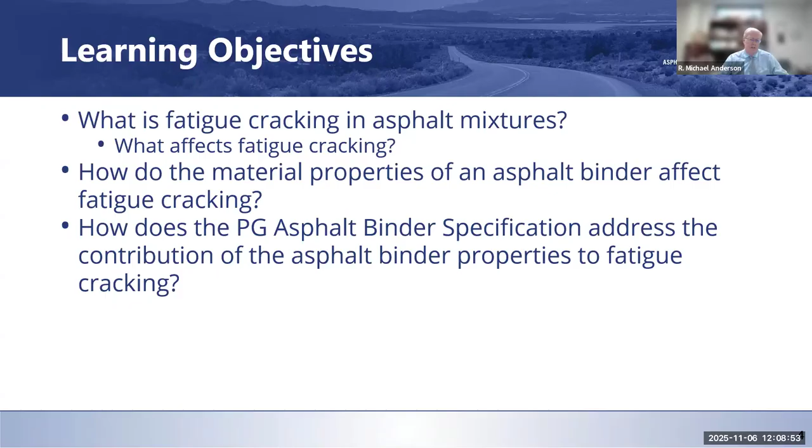Penetration grading came about around 1946, moving to viscosity grading in the early 70s, and then we went to PG grading in the 90s. So it makes sense that we've had something around for 30 years. Materials are a little different, tests are a little different. Maybe it's a good time for us to look at whether the specification needs to evolve a little bit. And that's really what this research, not only the 959 research but also the 960 research, was intended to look at.

So the first thing I did was pull this slide, which is actually from the training materials developed for Federal Highway Administration Demonstration Project 101, back in 1994. The Federal Highway Administration, specifically their Office of Technology Applications, wanted a way to educate people on the new PG system.

So it started with, how does the binder specification address some of these distresses? I pulled this pretty much verbatim from that slide deck, just because I thought it was interesting to go back and look at what we said Superpave was doing, and how that applies to what we're doing today.

So fatigue cracking, when we're talking about that, it's distress in the wheel path. It's progressive damage, usually showing up first as longitudinal cracking. You can see it progress to alligator cracking or potholing. When we say alligator cracking, it looks like the back of an alligator, and eventually some of those pieces break out and you get potholes and that sort of thing.

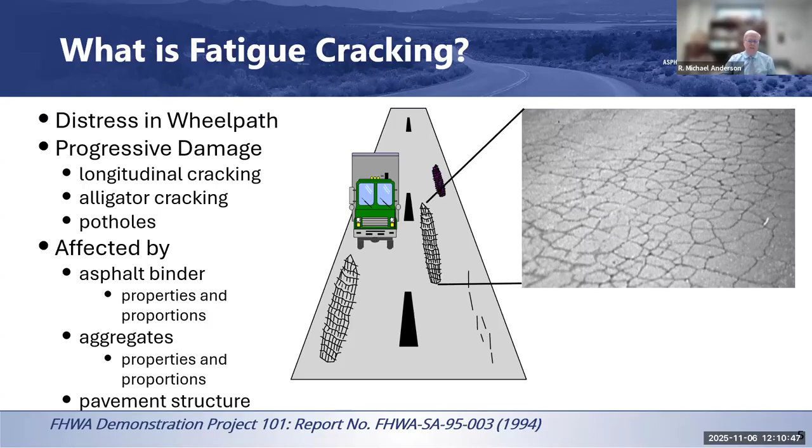It's affected by asphalt binder, both the properties and proportions of the binder, as well as the aggregate properties and proportions, and the pavement structure. All those things have to work together for fatigue cracking. You can have one or two of those be great and one be really poor, and you can still have a problem. Whenever we see distresses, we've got to look into the cause of those things - sometimes it's materials related, sometimes it's design related, sometimes it's construction related. All of those things can definitely have an impact on what our actual performance is going to look like.

Dr. Dave Anderson, many of you know Dave, took this picture and used it in training for our certification programs through the Asphalt Institute. It's a good picture of fatigue cracking on a roadway - a beautiful picture, except for the road looking a little bit cracked up.

Fatigue cracking itself is a very difficult, complex thing to describe. You can have bottom-up cracking, which is where we see alligator cracking. But the other thing people see is top-down cracking, and that's a little bit different. So cracking is not all the same, and I think that's why it's really been a challenge for us to figure out how to characterize what impacts fatigue cracking, or what cracking in a roadway looks like.

So again, this is just a little bit newer version of what we were saying - basically that you're going to have asphalt binder, mineral aggregate, volumetric proportioning, and other factors that are going to happen.

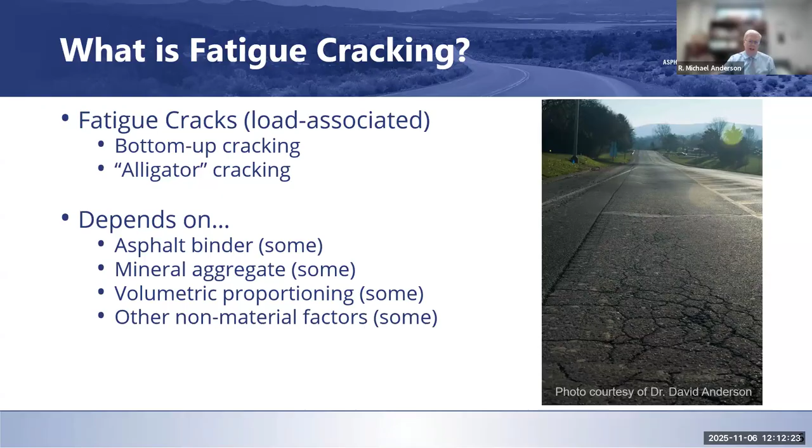We'll talk a little bit more about top-down cracking, because that's usually caused from shear stresses at the surface, where it exceeds the strain resistance overall of the mixture. That's something a little bit different than the traditional bottom-up fatigue cracking we're looking at. We'll address both of those throughout this series.

So a little bit on asphalt concrete behavior, or asphalt mixture fatigue behavior. Again, this is another image we use from the FHWA Demonstration Project 101, the Federal Highway Administration National Asphalt Training Center text, if you will. It basically was just trying to indicate, how do you get longer fatigue life? How do you get shorter fatigue life? Not that you want it necessarily, but it's kind of the converse of what you see there. And then what are some of the exceptions you see?

So really, to achieve that longer fatigue life, we're typically looking at bottom-up fatigue. We're looking at more flexible materials that are softer, less brittle. The asphalt binder plays a big role in that, and that's important particularly if the pavement structure is relatively thin. Reducing the strain in the asphalt mixture is really going to help out. So if you make the pavement thicker, you're reducing the strain before you get to the bottom layer.

That's really going to help reduce that strain overall, and help with performance. As far as shorter fatigue life, it's really the converse. You're not trying to have those things, but if you're looking at why you're having shorter fatigue life, it could be stiffer materials, thinner pavements, higher stress strain levels, and that's kind of where the exception comes in, because it's that structure that matters as well, including the non-deflecting support layers.

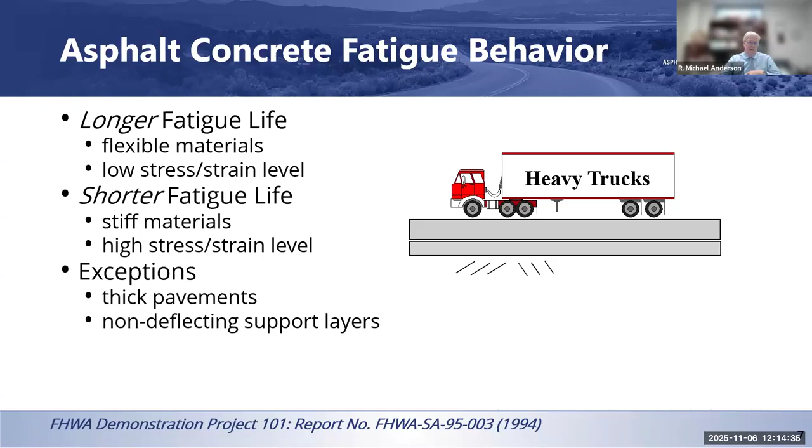So during SHRP, how did they address fatigue cracking? If you go to SHRP report A367, it talks about how they selected the specification criteria so that you got satisfactory resistance to fatigue cracking. Basically, within an asphalt binder specification, what you're wanting the asphalt binder to do is to do its part. You don't want it to be the cause of a failure. You want it just to do its part. It's not going to be able to overcome weak subgrades or whatever have you. It just needs to not be the reason why the failure is occurring.

And so they recognized that during SHRP, it's perhaps the most difficult challenge in how to put it together. They talk about it first occurring late in the life of a pavement. So what that means is you've got to test the asphalt material in a stage that simulates what happens after it's been in service for a number of years. That's really at least part of the reason why the pressure aging vessel was developed, to try and simulate that longer term aging we were going to see in the binder, so you could characterize what it's going to look like after it's been on the road several years.

Then they also talk about ideally those properties including crack propagation properties as well, but noted those are considered too complex for use in a specification, and surrogate properties must be selected as the specification criteria. So if you look at fatigue cracking, what they generally do is break it down into initiation of the crack and then propagation of the crack. So part of it is getting the crack to start, and then how does that crack progress? They felt putting both of those together was a little bit too complicated, but if they use surrogate properties, they could relate to those.

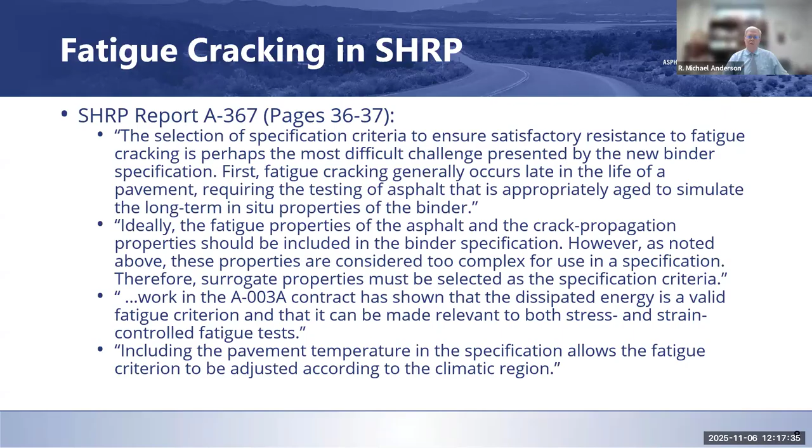And they also recognized that a specification needed to include the pavement temperature to allow the fatigue criteria to be adjusted, so that it's appropriate for the climatic region overall. So that was an important piece of it. We didn't want to just do it at 25 degrees C, for instance.

So what did all that mean? Well, dissipated energy, as they talk about it up there, in a dynamic shear test is appropriately calculated as G star times sine delta. And so that's where that came from.

That's why we've got this PG intermediate temperature criterion that we use on the DSR, this G star times sine delta property that reflects the dissipated energy in an asphalt binder after it's been aged a number of years. They used and relied on that in light of a number of field trials, but one of the ones they reference is the Zaca-Wigmore test road, and they referred to Figure 22 there in the SHRP Report A367, and I thought that was interesting.

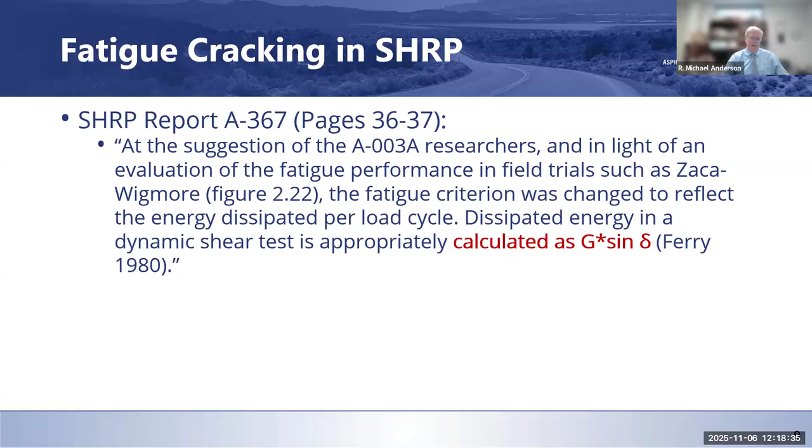You can go back and look at the Zaca-Wigmore test road, and what you'll find is there's a reference. I think I may have it on one of these slides. If not, you'll see it in the notes to this presentation. But in 1969, there was a paper in the Association of Asphalt Paving Technologists Journal, AAPT Journal, volume 38, called Final Report on the Zaca-Wigmore Asphalt Test Road, by Zube and Skog.

In that paper, they looked at this test road that was placed in the 50s and monitored into the 60s. They looked at this and found there were two main types of failure that occurred during service life on the project. First was fatigue cracking, and they said that was the most prevalent overall.

That was related to recovered asphalt binder stiffness. So at least a large part of that, the consistency of the recovered asphalt binder, was related to the dissipated energy, or G star times sine delta. From that standpoint, they looked at that parameter and said, okay, that's the reference for what we're going to look for in a fatigue parameter within the PG system.

The other part of that was not something directly addressed, I'll say, but it was recognized, and that's that they also had block cracking with raveling. That was more prevalent in the passing lane. So fatigue cracking happened in the driving lane, where you would expect it, since that's where the traffic loading was. But in the passing lane, where you didn't expect much traffic, they found block cracking with raveling that was due to a gain in shear susceptibility during weathering.

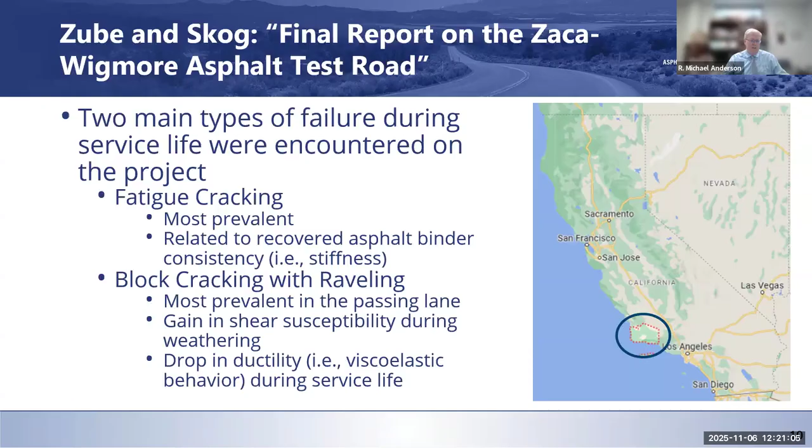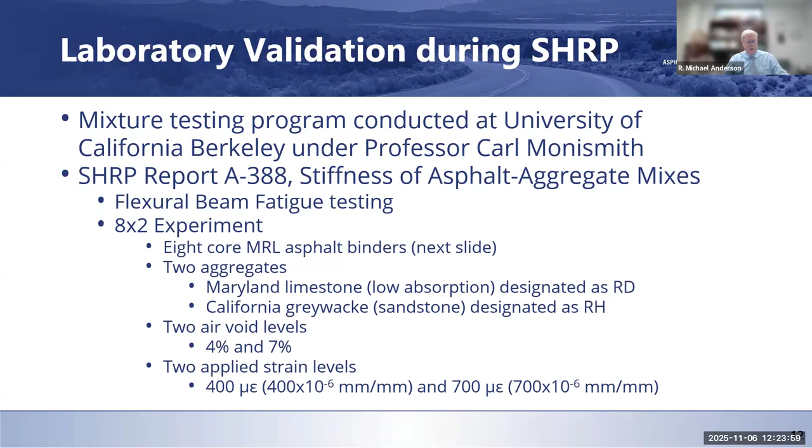One was a Maryland limestone that was low absorption. The other one was a California graywacke, which was a sandstone, and they were designated as RD and RH. There were 2 different air void levels, 4% and 7%, and 2 different applied strain levels at 400 microstrain and 700 microstrain. Those specimens were compacted using rolling wheel compaction in the lab, and then they cut the slabs out and proceeded to test them.

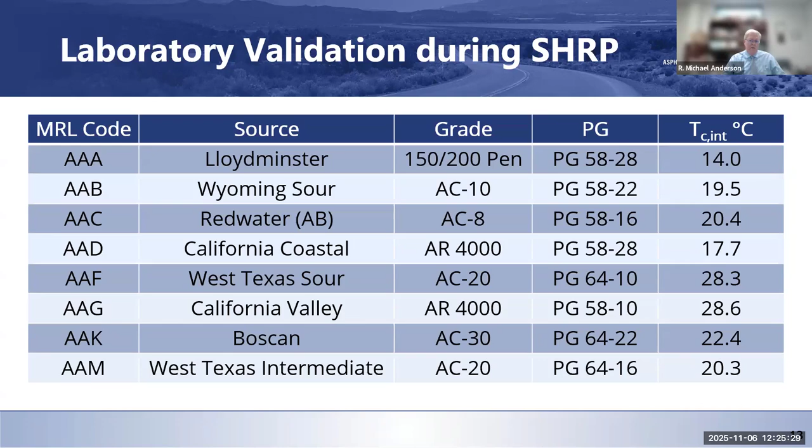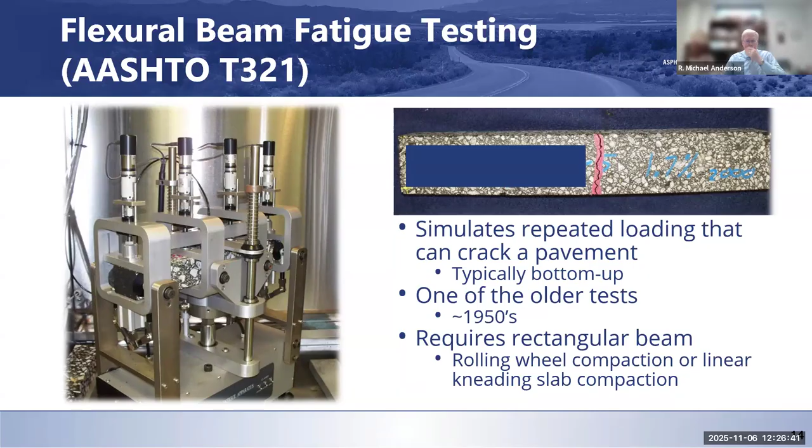So you can see what the beam looks like after it cracks. You develop micro cracks and then ultimately cracks that occur in the specimen. We've just used a red paint pen to kind of highlight what that looks like within the specimen itself. It does require a rectangular beam, so it's not something that we used routinely with our gyratory compactors - we don't make those specimens.

So how do we analyze this data? In the original version of the procedure, it was defined - failure was defined as whenever you reached a number of cycles where the stiffness dropped to 50% of the original stiffness. That's how failure was defined. It was called N sub F.

It was not necessarily, it was really based more on unmodified asphalts, I guess, than certainly on modified asphalt, but it was believed to represent the point where microcracking would develop into macro cracks, and then you would eventually cause the stiffness to drop more dramatically. It did seem to work reasonably well for unmodified materials.

As we started using more modified materials, as different types of materials came on the market, it was not necessarily representative. And some work that was done by Dr. Geoff Rowe with Abatech and I think Dr. Mark Bouldin, who may have been with Koch or Shell at the time, I'm not sure which, but they did some work where they looked at defining a new way of defining failure.

And it has to do with the point where the product of flexural stiffness times cycles was a maximum, and that indicates the onset of cracking that would occur. If you plot that against the traditional way of looking at it, for unmodified asphalts, it tends to be right around 50% still, but for modified asphalts, it does a much better job of characterizing that material.

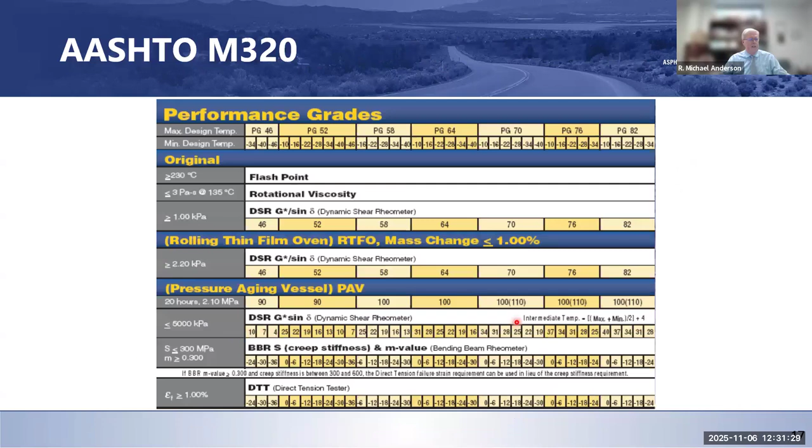So ultimately, this is what led us to AASHTO M320 - the intermediate temperature parameter, the DSR G star times sine delta after PAV aging. That's our intermediate temperature for cracking fatigue.

Some of the challenges we had early on - you saw high variability in the DSR, particularly at that intermediate temperature. This was reported originally in some of the first proficiency sample programs from AASHTO Resource, where they looked at between-lab variability for G star times sine delta being at 40%, which is quite high. To put that in perspective, you could have a lab with a 3,400 kilopascal value and another lab with a 5,100 kilopascal value, and those would be considered within acceptable tolerance.

So they would be considered statistically the same. That's not something folks feel comfortable with, which means if you're trying to produce a material, you want to make sure you're building in for that variability. So you have to adjust for that when you're making your production. And that was a concern, obviously, in what that looked like.

Now, through time, through training, through better equipment, all that sort of thing, the variability has reduced, and you can see it's now down. More recent precision values are at 27.4%. That's better. Still some variability, but certainly better than what we saw originally.

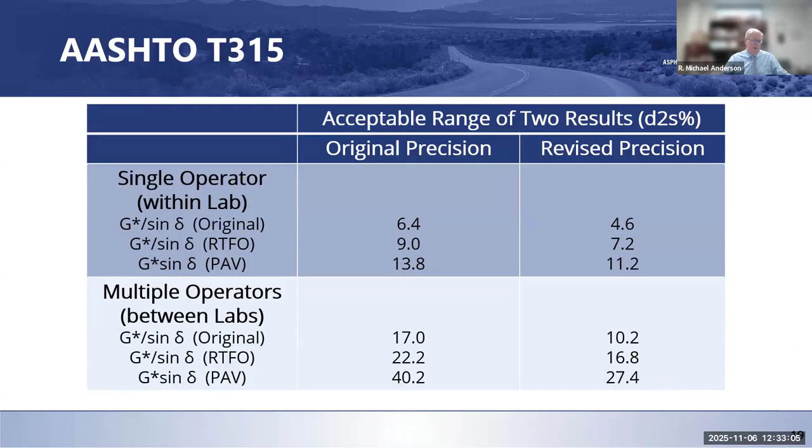But that led to some concerns about, well, how do you have something a little bit better? And ultimately, that's where this came in. This was a revision suggested through the task force of the Asphalt Institute Technical Advisory Committee, along with some work done within the expert task group, binder expert task group, to look at intermediate temperature stiffness, what the phase angle would be, and how might you allow something that seemed a little bit stiff but otherwise had good viscoelastic properties - through the use of phase angle, a minimum phase angle overall.

There were a lot of things looked at to try and reduce the variability. That included using larger plates, reduced strain levels. Those were all things being done.

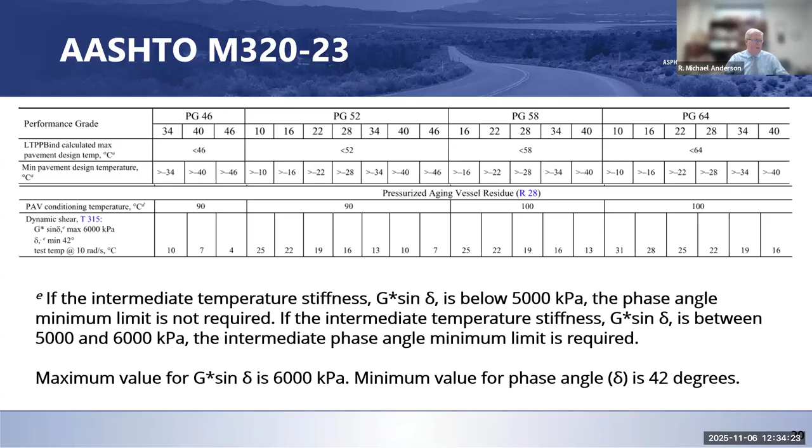But because we couldn't lower the variability through changing test conditions, it seemed appropriate to ask how do you adjust it to account for the fact that you've got a binder which has a little high stiffness, but its phase angle is still pretty good, indicating good performance and what should be better relaxation. That's what led to this proposed change that ultimately got adopted in AASHTO M 320, the 2023 version.

So let's go to NCHRP report 673, from 2012. This came from NCHRP 9-33, which looked at mix design and a commentary on how you make changes.

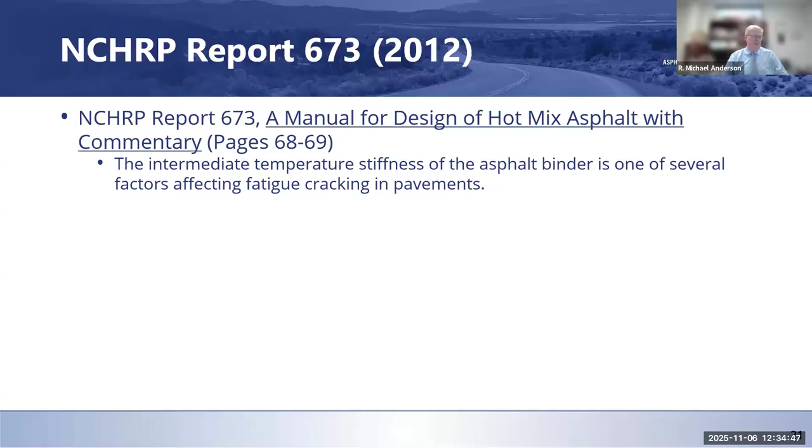What they noted was that intermediate temperature stiffness of the binder is one of several factors affecting fatigue cracking. They did say top-down cracking was an important distress, not just bottom-up fatigue cracking, particularly in overlays and thicker pavements. It was not a distress that was completely understood, but binder stiffness was at least a contributing factor.

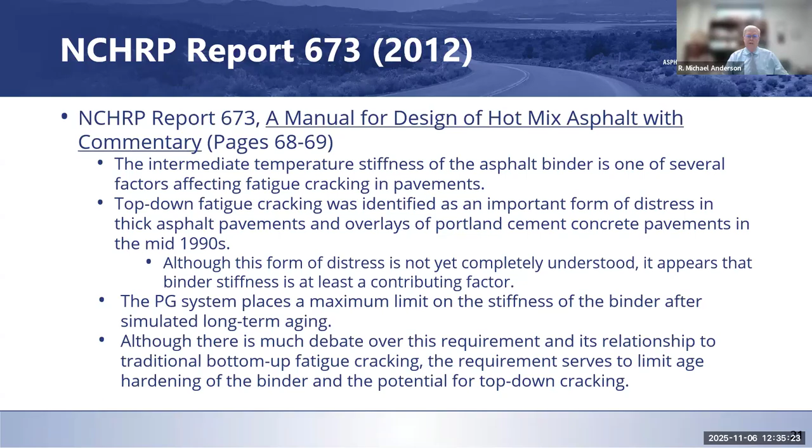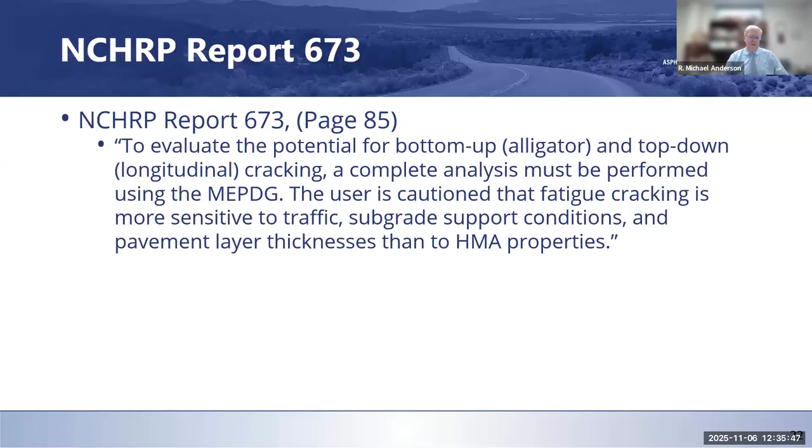The PG system places a maximum limit on stiffness after simulated long-term aging. It does serve to limit age hardening of the binder and potential for long-term top-down cracking. But they also caution that if you really were going to look at bottom-up alligator cracking, top-down cracking, and longitudinal cracking, you should take a look at a complete analysis using the MEPDG, noting that it's more sensitive to traffic, subgrade support conditions, and pavement layer thicknesses, possibly more so than even HMA properties.

So again, what we were looking at is controlling or mitigating the impact of what role the asphalt binder has to play in what fatigue cracking is going to look like.

So our learning objectives overall: we wanted to know what fatigue cracking is in an asphalt mixture. We talk about that as repeated loading from traffic that results in longitudinal or alligator cracking. It's tensile strain at the bottom of the asphalt layer that exceeds the strength of the mixture, and that's where you get cracking that propagates to the surface. If you're talking about top-down cracking, it's caused by excessively age-hardened asphalt.

So what affects fatigue cracking? Mixture stiffness, which is a function of in-place air voids, the volume of the asphalt binder, stiffness, and age hardening. That may not even be a complete list of what affects mix stiffness, but certainly those are key factors in what mixture stiffness in service looks like.

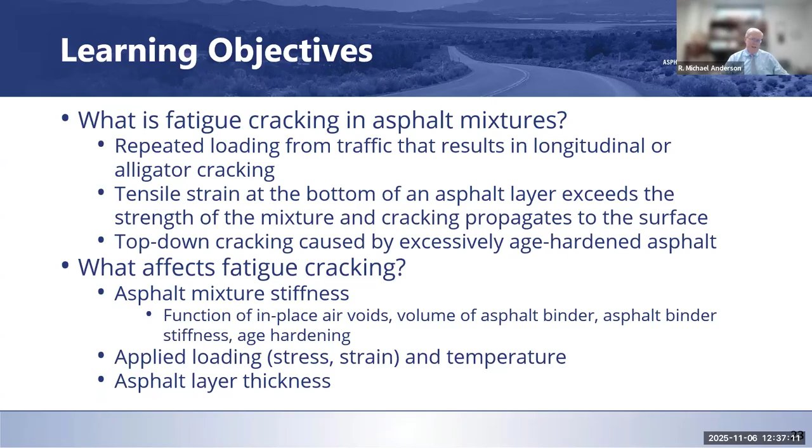The applied loading is going to affect it - how much traffic you've got on it, how heavy is the traffic, what's the strain being transferred down to the bottom of the layer, and what's the temperature? That's going to matter as well. It impacts the stiffness, it impacts what that strain is going to do. And then the asphalt layer thickness is also going to matter. Those are all going to play into it.

How do the material properties of an asphalt binder affect fatigue cracking? Stiffer asphalt binder after aging can lead to increased cracking that we see in thinner asphalt mixtures in particular.

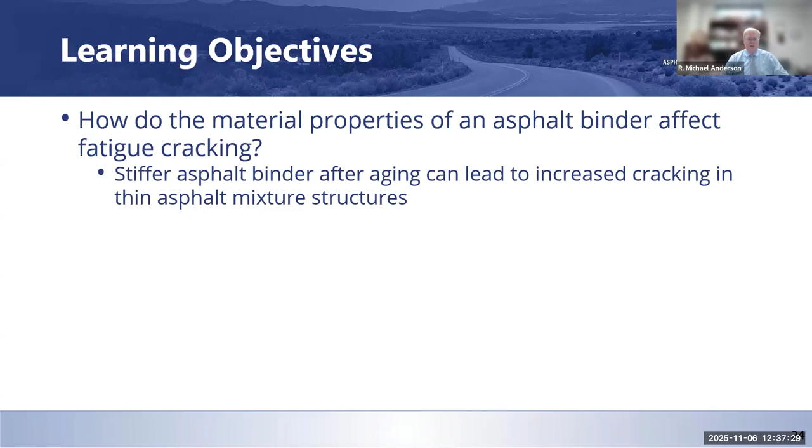And then the last thing we talked about in the learning objectives was how does the PG asphalt binder specification address the contribution of the asphalt binder properties to fatigue cracking? We want to limit the stiffness of the binder through the use of the dissipated energy parameter, that was G star times sine delta, determined after aging at intermediate temperatures appropriate for the asphalt binder grade and the climate in which it was used.

That specification limit in the PG system was based initially on the observed fatigue cracking they saw largely on the Zaca-Wigmore asphalt test road, with recovered asphalt binder properties after 8 years in service. It was validated in part through laboratory experiments conducted during SHRP, and ultimately that's how they came to choose the parameter used within the current version of the PG system.

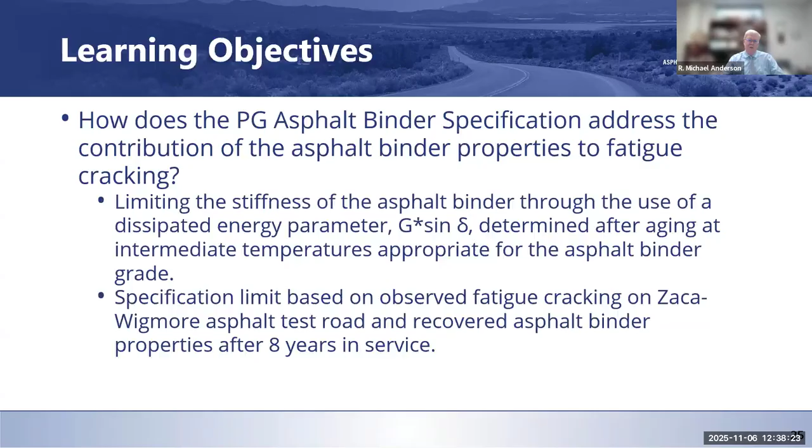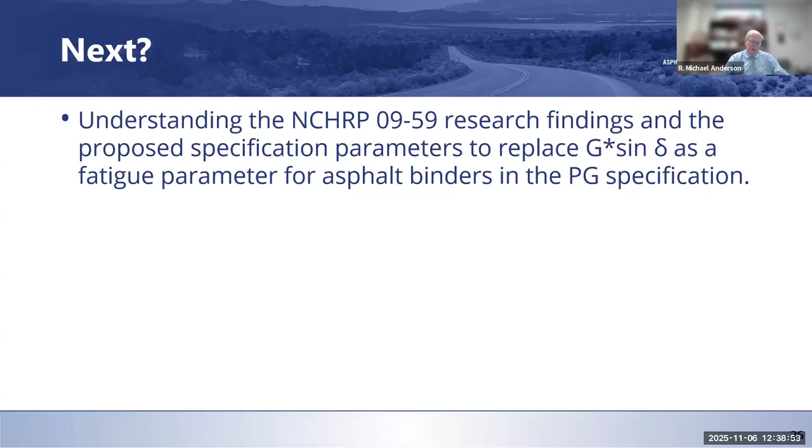So what's up next for us? It's really understanding what the NCHRP 09-59 research findings were, what they have proposed as specification parameters to replace G star times sine delta as a fatigue parameter for asphalt binders in the specifications. We'll talk a little bit about their findings in the next presentation, and in the following one, we'll talk about the recommendations and what the impacts are overall.

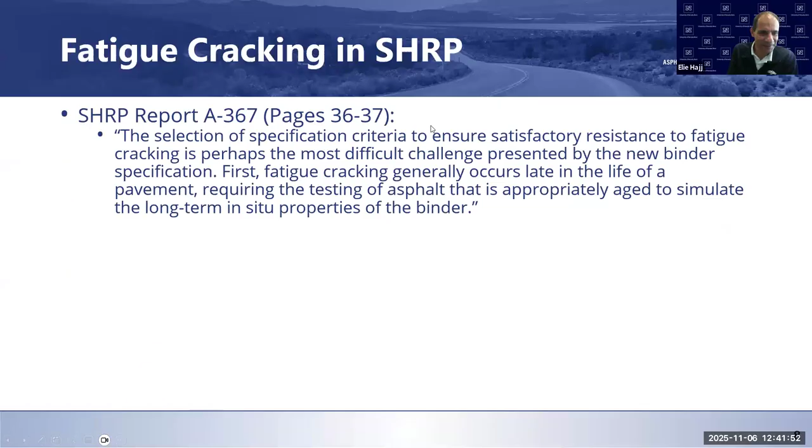The question is, what was the depth within the pavement for the recovered asphalt binder? And does this imply that the specification developed based on this information is for near surface binder characteristics?

That's a great question. I don't know that, and I'd have to go back through the report to see what the depth is. My guess is they probably took conventional cores out of this roadway and then recovered it, which would have meant they used the entire depth of the layer they were looking at. So my guess, I'm not going to say this is definite, but my guess is they're looking at the entirety of probably maybe as much as a 2 to 4 inch layer that they would be recovering. And you're going to see definitely higher stiffnesses as you're closer to the surface than you would further down. That's why oftentimes when we're doing forensic analysis, you probably get a good representation of how the material ages overall by doing the combined amount.

But if you wanted just to look at near surface aging, we'll typically cut it within the top half inch or thereabouts, or top 12 millimeters of the surface, just to take a look at what near surface aging looks like. Very good.

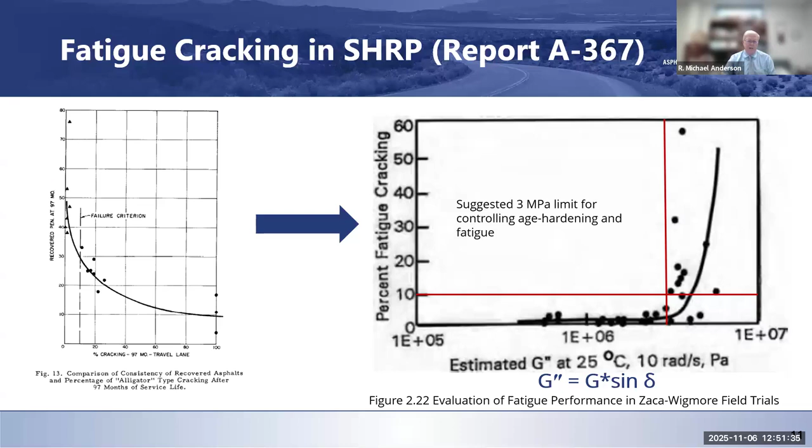Right, so I think in general, going back - so I'll go back to the slide, is it back or forward? It might be forward here. Yeah, so I'll go back to this slide because this is one that I lean on.

The PG specification, which was based on G star sine delta, a lot of people from the very beginning didn't really love that. They found some reasons why it didn't correlate with some cracking that they saw. But the problem is cracking is really complicated. I think in general, looking at the stiffness of the material, if you just look at fatigue equations in general, the stiffness of the mixture, which is affected by the stiffness of the asphalt binder, has an impact on what fatigue cracking looks like. The binder has a role to play with that.

What we don't know, based on what we'll see in some of these future presentations, maybe the next presentation, is whether that's a good enough parameter. Does it capture not only the stiffness of the asphalt binder, but adequately capture the contribution of the viscoelastic nature of the asphalt binder to the performance? That's partially where the research in NCHRP 9-59 was looking - is it good enough? I don't know that it's bad. This is what some of the data tells us, but I don't know if it's quite good enough. Without getting too much into that other presentation, I do think there are some other options for us.